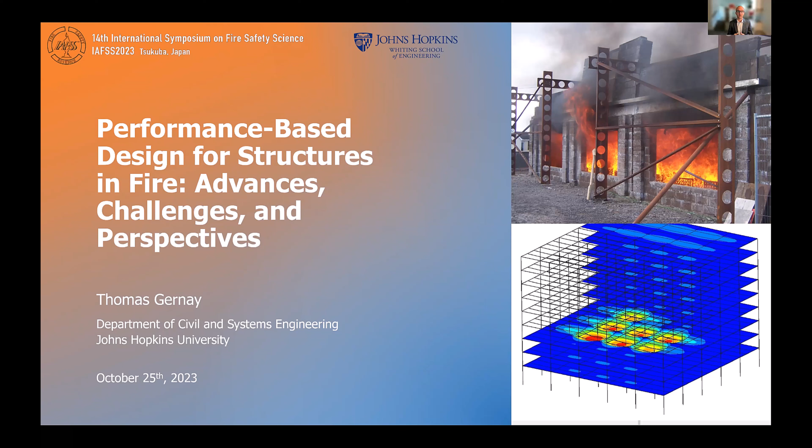I'm an assistant professor at Johns Hopkins University, and this presentation discusses challenges, advances, and perspectives in performance-based design for structures in fire. Most buildings are designed against fire using a prescriptive approach.

Prescriptive codes and standards prescribe generic requirements that lead to a prescriptive path to a solution. However, even for regular buildings, we do not know if the solution is optimal. We do not know the true safety margins or whether other design solutions will provide superior performance.

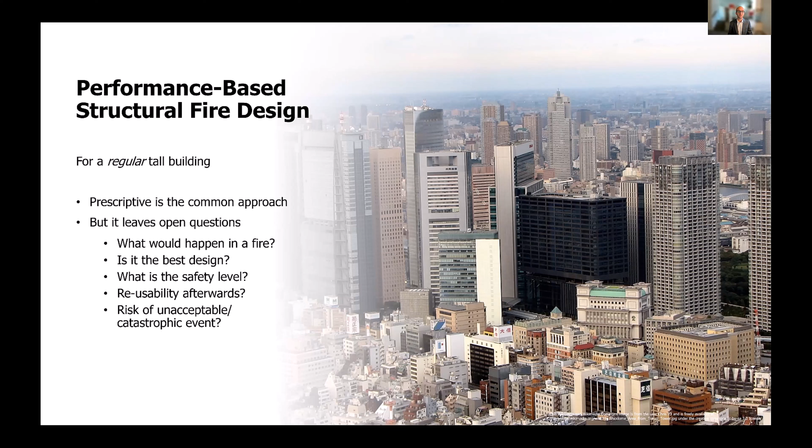Some of the questions that are not interrogated with a prescriptive approach are: what would happen in case of a fire? Is this the best design? Is this the most economical, the most robust design that we can come up with? What is the safety level against fire of this design? And then all questions pertaining to resilience, reusability after an event, and risk of a really catastrophic collapse.

These are not quantified. Now, if we consider even more innovative structures and next generation buildings developed to achieve sustainability or resilience, there is inherently a need to innovate and come up with new solutions for these, which means that there is a lack of precedent and prescriptive codes may not be well suited to lead to innovative solutions for those challenges.

How can we deal with fire when innovations may change the fire hazard? And how can we iterate towards solutions that are optimal, also integrating the fire performance? To answer those questions, we need an approach based on evaluation of the fire performance, which leads us to performance-based fire design.

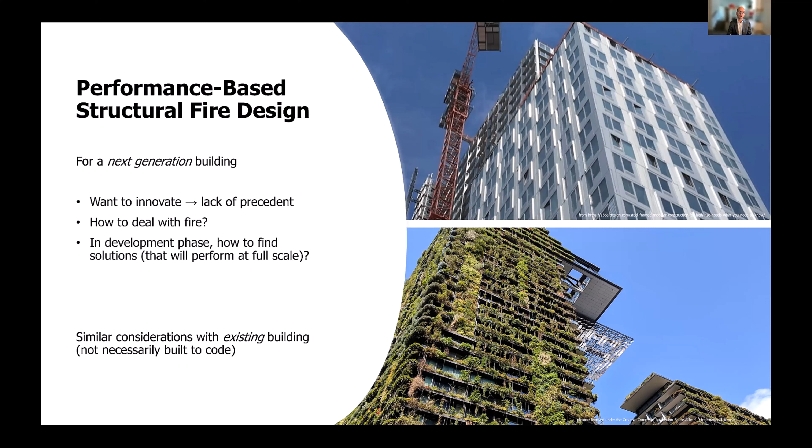So here comes performance-based structural fire design. In this context, this approach is very well suited when there is a need to predict the actual performance in case of a fire. Performance-based design starts with defining the end goal.

Then the engineer can leverage science-based methods and develop innovation and creative solutions to achieve these performance objectives. And as a requirement of the method, the engineers have to explicitly demonstrate the performance of the design. So frameworks have been developed, they exist to guide this process.

Generally, those frameworks or those processes come in three stages. There is a need to define the scope, objectives, scenarios, and approaches for the design. And this will be a conversation with the AHJs, the stakeholders. It needs to be agreed upon by all the stakeholders before.

Then the performance needs to be evaluated. So there, the structural fire engineers, fire protection engineers work to quantify those fire scenarios and the structural fire response, eventually quantifying the expected performance against the predefined fire scenarios.

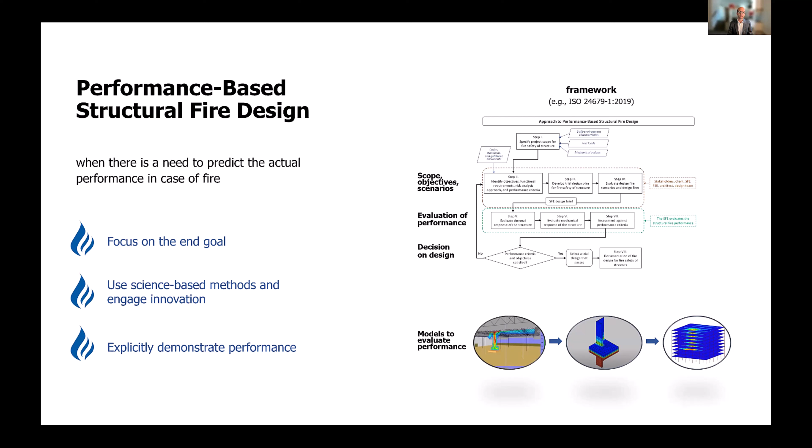And third, these different trial designs which have been assessed are considered, and there is a decision on which design satisfies the performance objectives and is selected. So this method relies on the availability of models and methods to evaluate and quantify performance of structures in fire.

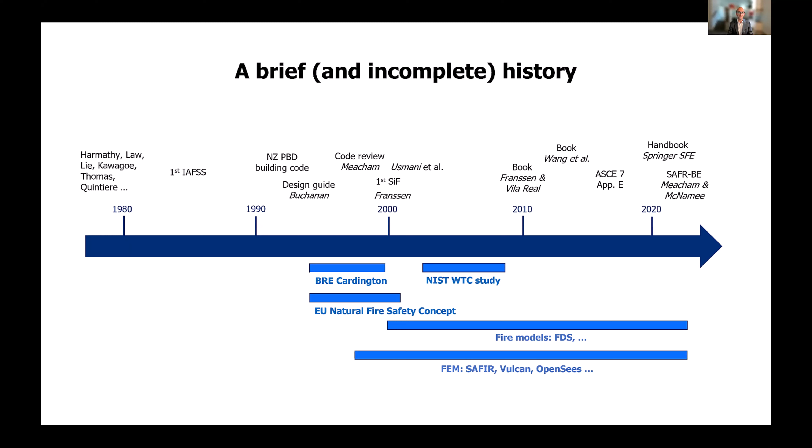The performance-based design approach is an alternative to the prescriptive design approach, meaning the two coexist, the two can be used, but the performance-based design approach requires more effort on behalf of the engineers and the stakeholders who have to review and approve the design.

So a legitimate question is to ask whether this is worth it, whether we really need this approach. And I would argue that yes, certainly it does bring a lot of value. And to support this, we can look at lots of examples where performance-based design for structural fire engineering has been used.

We see that there are a number of situations where the approach brings values. For example, when there is a need to explicitly quantify the fire performance and fire risk. The approach has been used also to enable designs, to think about architectural preferences, having steel exposed in these type of applications, to assess existing structures, to control the failure mode, making sure a structure would fail inward and not endangering the surrounding structures, to demonstrate stability to full burnout, and to develop design methods.

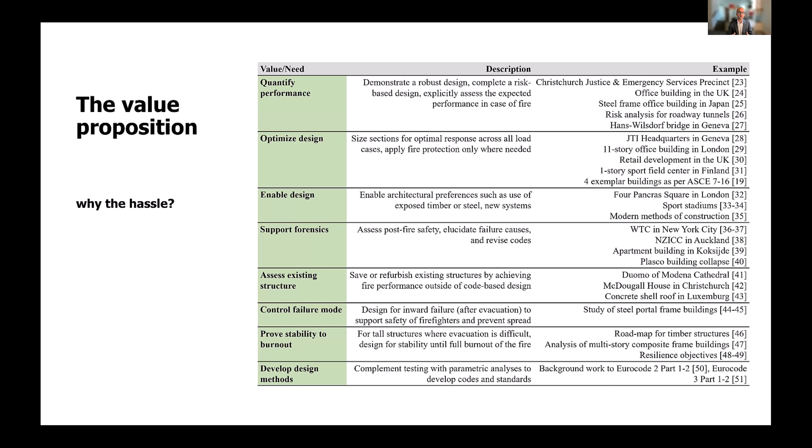For example, to optimize design, there have been many cases where the so-called tensile membrane action was taken advantage of in the design. It was found that it is unnecessary to protect individually all horizontal steel members in the building, but instead structural robustness and structural fire performance could be achieved through membrane action in the composite slabs with sufficient steel reinforcement. This behavior is well known since the Cardington fire test in the 1990s. It has been implemented now in many designs, leading to economically more optimal solutions, but also very robust designs.

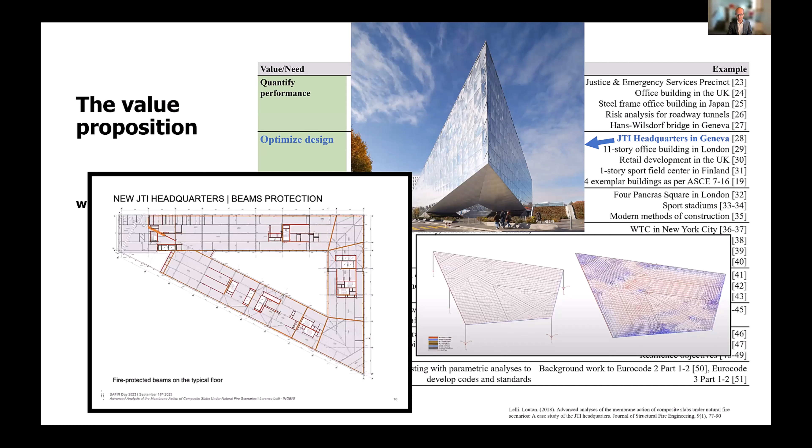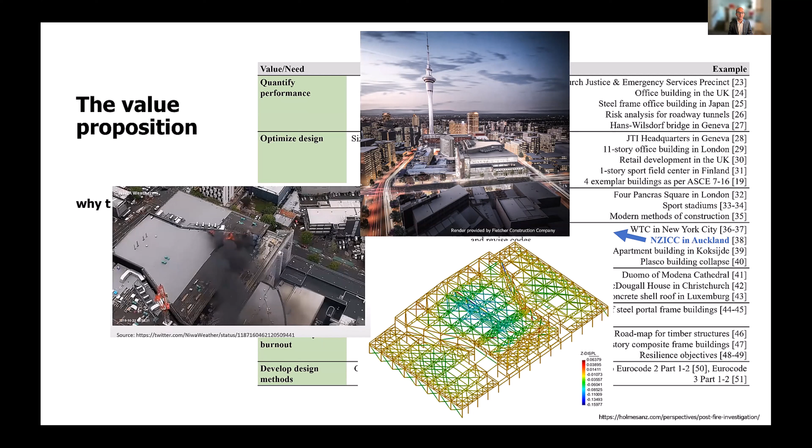As an example of forensics, recently there was a fire during the construction stage of a New Zealand International Convention Center. After the fire, there was a need for analysis to understand the damage and residual capacity of the structure, and performance-based fire design techniques and modeling came to support those decisions.

For the structural fire engineer, in order to enable this performance-based design approach, the crux consists in being able to evaluate the structural fire performance. The engineer will need appropriate data, models, and methods to conduct this assessment.

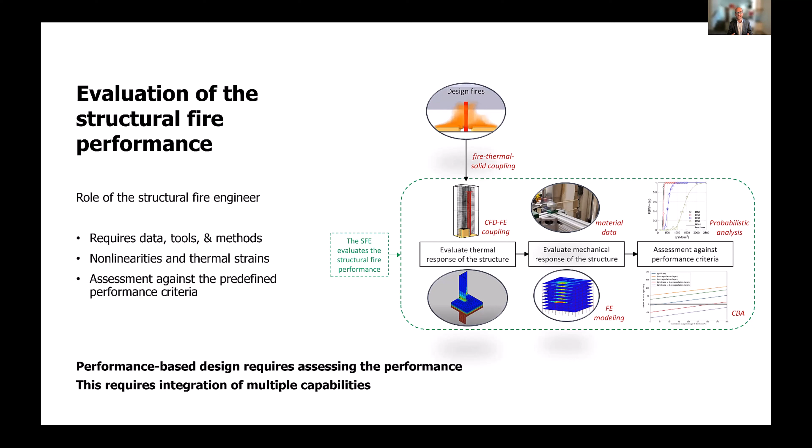The behavior of structures in fire is complex. Not only are the materials damaged due to elevated temperature, but there are also lots of non-linearities. There are thermal expansion strains that create redistribution of forces, and so the structural system response is relatively complex. As a result, performance-based design requires integration of multiple capabilities in terms of knowledge of the material and structural response and modeling software. Now let's discuss some recent selected efforts towards enabling this evaluation.

A key component consists in characterizing the response of materials at elevated temperature. This is not new—there have been tests on steel and concrete at elevated temperature for decades—but this is a continuous need because, first, new materials continuously emerge, and second, demands on those structures in fire also evolve. Nowadays, we want to be able to assess the response until full burnout, which includes measuring properties during cooling and in the post-fire stage.

We also look at expanding the capabilities of our finite element software. When we model an entire steel frame structure, we want to capture ductile fracture, but this requires characterizing the response under multi-axial stress state at elevated temperature. This is still new research that is needed there.

For example, in our team, recently we characterized the response of new high-strength cold-formed steel coming to the market that had not been studied at elevated temperature before. We also worked on characterizing the response of concrete during the cooling phase in collaboration with Professor Bamonte at Politecnico di Milano. After conducting those experiments, we developed constitutive models. We propose relationships for implementation in standards and building codes, and we incorporate them into finite element software such as SAFIR, so that engineers can run simulations with these new materials or with these expanded situations, including cooling.

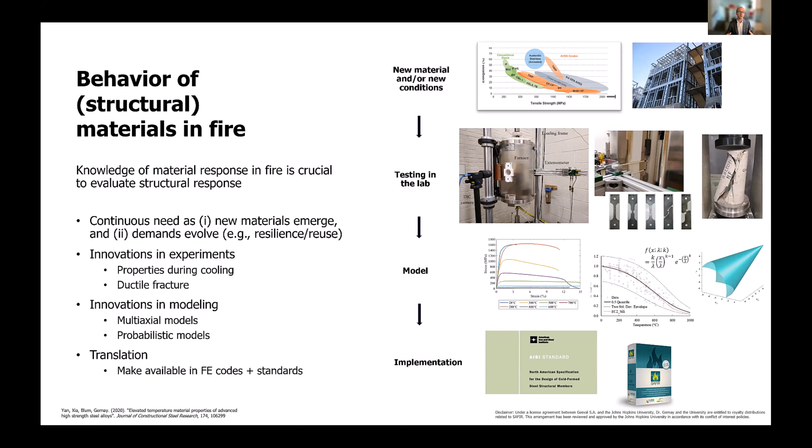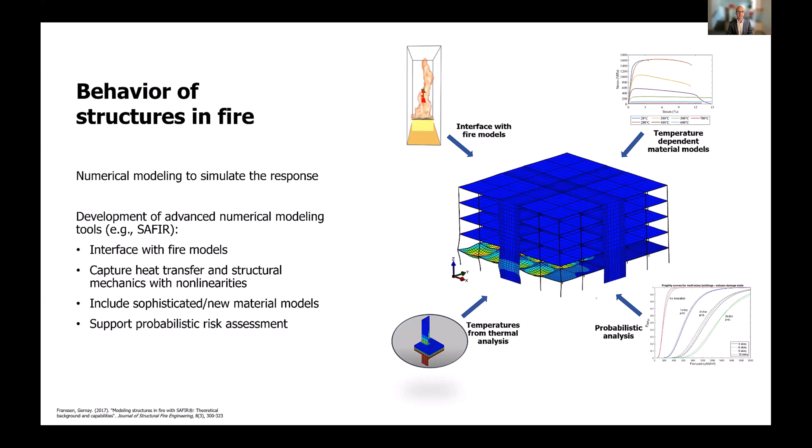Another key component in evaluating the structural fire response is having the ability to simulate the response of an entire structure. A lot of work has been done to advance finite element software, notably to make sure those software can combine different types of elements, characterize the thermal response and the structural response, and also incorporate interfacing with advanced fire models, new temperature-dependent material models, and, more recently, the ability to conduct probabilistic analysis in order to support risk assessment of structures in fire.

This work to advance numerical modeling to simulate the response is also continuously advancing, and there are continuous needs. For example, whenever a new structural system is developed, there is work needed to make sure we can model those structural systems.

With existing structural systems, there are research questions regularly investigated. For example, recently we modeled full-scale fire tests conducted at NIST on steel concrete composite floors, where the experiments looked at the comparison between prescriptive and performance-based design for the floor system in fire, including the development of tensile membrane action in the performance-based design. We modeled those tests to gain further understanding on optimal reinforcing steel details for the system.

More broadly, this helps characterize the economic impact of the performance-based design. This entails studying the performance of two designs comparatively against a range of fire scenarios and quantifying damage and losses in a probabilistic framework. The question we want to answer is, over the lifetime and on average, if either design is applied, which one brings the most economic benefits in terms of fire resilience?

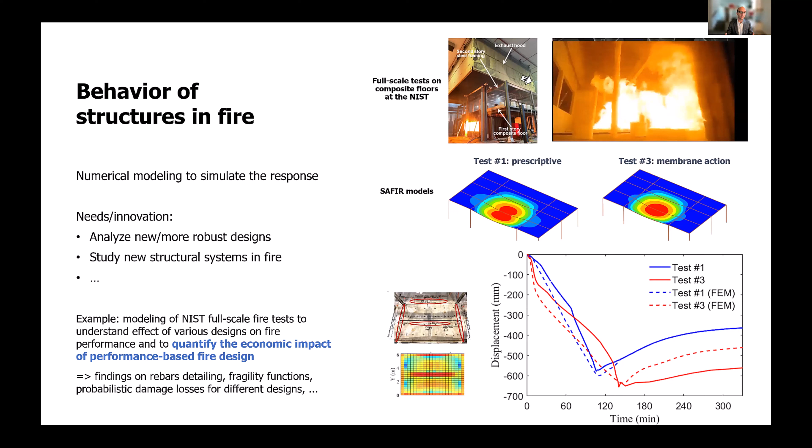The concept of looking at probabilistic risk analysis and multiple fire scenarios is really a key advantage of performance-based fire design. With this approach, the structural response is quantified and the safety can be evaluated.

In this study, for example, we looked at a multi-story steel concrete building and designed it considering different performance objectives, predefined in terms of scenarios such as fire spread across multiple floors, as well as probabilistic severity of the fire as correlated to the percentile of fuel load distribution in the room.

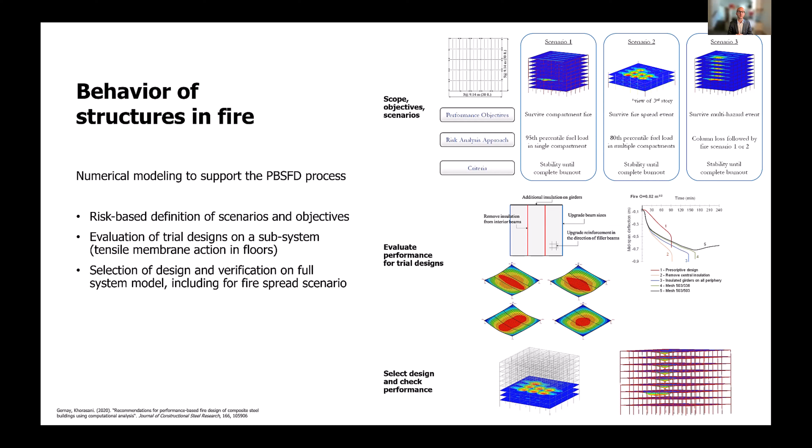We can run analysis for all those scenarios, and look at different trial designs in order to derive the optimal design in terms of detailing of the section dimensions, the reinforcement area in the floor, and so on. Then we can validate the performance of the selected trial design against all those scenarios in full-scale numerical models capturing the structural system response.

These probabilistic risk assessment studies allow us to make informed decisions which account for all the uncertainties in the process. There's been a lot of work done recently to characterize the uncertainties, such as in collecting fuel load data and providing probabilistic distribution for those data. But we also worked on uncertainties in the live loads during a fire event, and on the material response for steel, concrete, and timber properties at elevated temperature, and so on.

So when we develop better data for all those inputs, as well as the capability to run stochastic finite element simulations, we can now characterize our structural fire response in probabilistic terms and generate fire fragility functions that quantify the probability to reach different damage states in case of fire, accounting for all uncertainties and for different types of designs. Those fire fragility functions can be developed for different prototype buildings and different nominal designs.

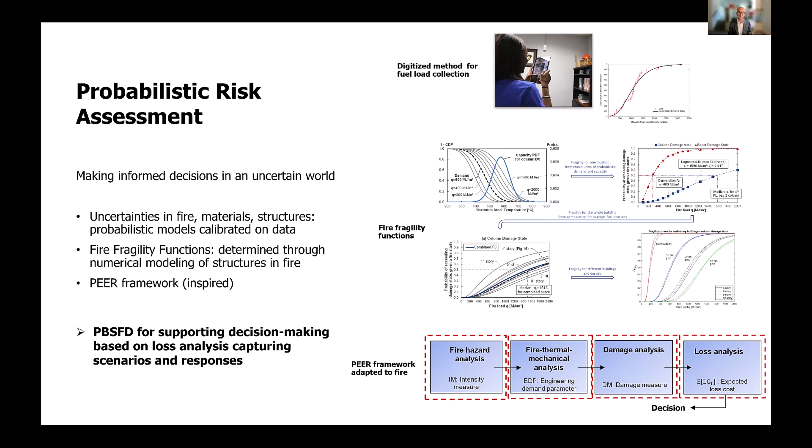In the end, our efforts in the field of structural fire engineering parallel those made in other fields such as seismic engineering, where the PEER framework is now widely used in order to account for uncertainties across the process, from hazard characterization all the way to loss analysis, which in the end can support rational decision-making for the design. I will now say a word on the perspectives in this field and the use of those methods.

One key research question that we are looking at as a field now is to work toward multi-hazard resilience. We recognize that fire is a very important hazard for structures, but so are other types of hazards. An optimal design obviously needs to address all those hazards, and there are situations where it's important to consider sequentially several hazards. For example, we look at the effect of an earthquake on the fire performance of buildings.

Indeed, if there is an earthquake striking a large city, there will be hundreds of thousands of buildings affected or damaged by the earthquake. And it's important to know whether repairs or rehabilitation is needed for all those buildings in case the fire protection systems are compromised or the fire performance is compromised.

So as part of this effort, next year there will be a 10-story cold form steel building test on the shake table at University of California, San Diego. Following this earthquake testing, there will be live fire tests in the building where we will look at the fire performance of the systems, including fire protection system, gypsum panels, and so on, in order to understand the structural fire performance of those buildings after an earthquake.

More broadly, what's important is that performance-based structural fire design can aim at integrating the fire design with other load cases, identifying the overall optimum design, and coming up with solutions that are robust even in case of sequential hazards.

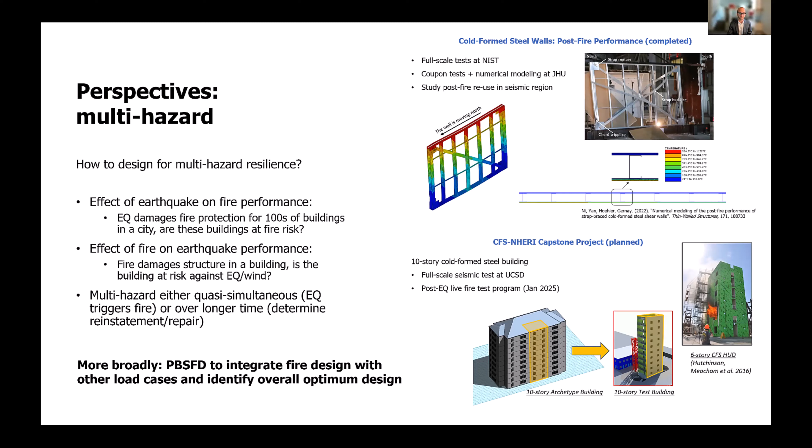Another important perspective for the field is to address the fast innovation made to tackle the climate crisis, and the development or use of biosourced materials in larger and taller buildings. Those innovations may bring new fire hazards that cannot be interrogated using prescriptive design. With new structures and new solutions, we need analysis-based methods rooted in fire dynamics and structural mechanics to understand the response and safety level.

So a lot of the techniques we've described, characterizing material performance, simulating structural response, bringing in probabilistic risk assessment, will be very helpful and needed in order to develop fire-safe, sustainable innovations.

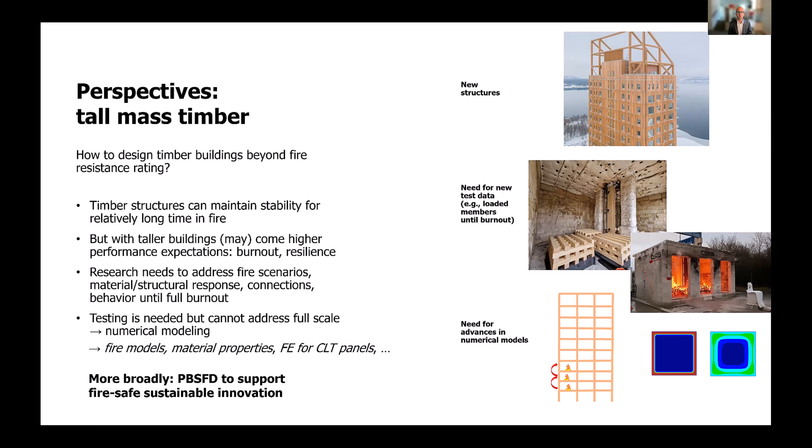As part of this research effort, we are notably looking at new experimental tests on timber glulam columns, which are loaded and subjected to fire. We study their behavior until full burnout to understand and develop designs that could survive the entirety of a fire event.

As we've discussed, there have been lots of advances in performance-based structural fire design. The approach has also already been used in many countries around the world for many types of applications. However, some challenges persist: technical challenges, education and competency challenges, and political challenges to broader adoption of this approach. Technically, there are still some phenomena that are poorly understood.

There is still research needed to characterize structural fire response, and there's a challenge with the computational cost and complexity of these models, especially when we want to make sure the assessment is robust and captures uncertainties and various scenarios.

There are perspectives to overcome those challenges, and research is continuously developing. There is exciting research being done on mass timber buildings in fire to bring those solutions. There are also opportunities combining physics-based and data-based models for questions that have been intractable for a long time—maybe machine learning and data mining can now help achieve a breakthrough combined with deep physical understanding of the processes. There are also challenges in education and competency.

Structural fire engineering is not in common civil engineering curriculums. There is also a lack of awareness of the potential benefits on the part of stakeholders, and AHJs can be wary of going that road because it's another responsibility and it may be hard to identify reviewers for the designs.

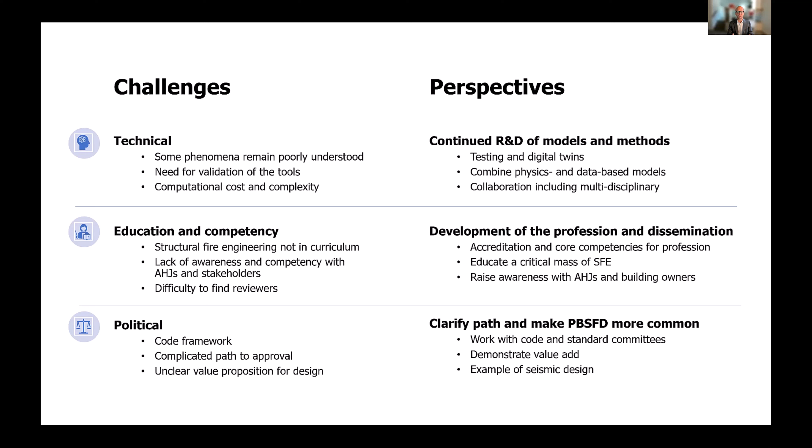And finally, there is work to be done to demonstrate those benefits and raise awareness, showing examples of structures in which this method has been successfully implemented to the benefit of all stakeholders.

To conclude, it is clear that fire hazards govern many aspects of design in a building. It is also a key consideration for a lot of innovations in terms of building materials or structural systems. In that context, performance-based structural fire design can deliver a lot of value and support innovative solutions, because it is a goal-oriented method that allows explicitly evaluating the performance of the system in fire.

It has already been implemented in numerous field projects. It is meant to live alongside prescriptive design for regular and common buildings, but it could be made more mainstream and commonly applied, which would add value. But there are challenges to overcome to make that possible, notably technical, political, and education challenges.

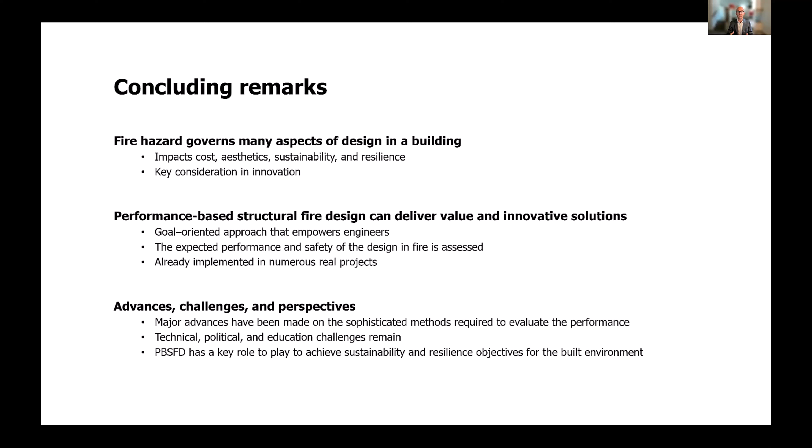In this presentation, we showed that there have been a lot of advances in the field, and continued advances in supporting performance-based structural fire design can play a key role in enabling sustainability and resilience innovation for the built environment. Thank you for your attention.